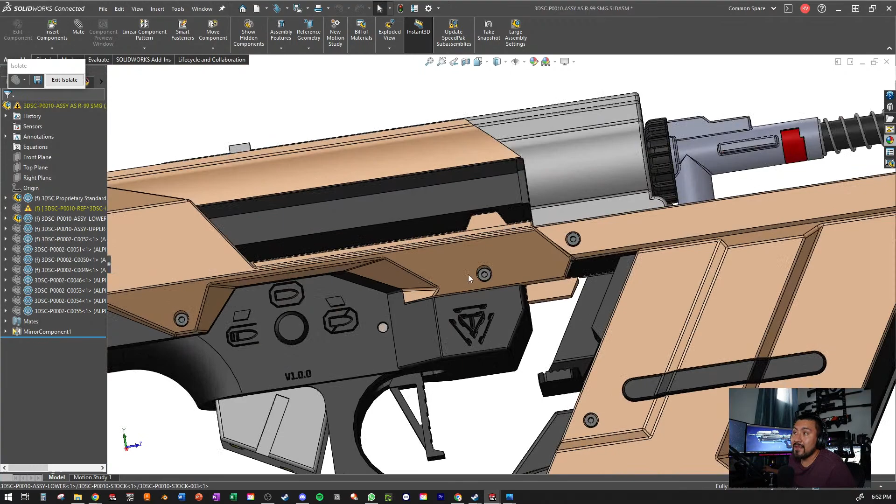So one thing, I am incorporating a dummy gearbox. So with this, you don't need to buy a whole gearbox and system to hold the grip and all that. Right here, I made a 3D printed version. You just gotta still buy the hardware, but at least you'll have a way to put together your gun without buying a gearbox. So for those who are just cosplaying with it, you guys could just buy the dummy gearbox, and there you go—you could put it all together.

And then some other things like a trigger, the fire selector—same thing, hardware. Buy the hardware, you can put this together. And then a couple other functionalities—I don't know if they'll quite work yet, but I'm working toward that goal.

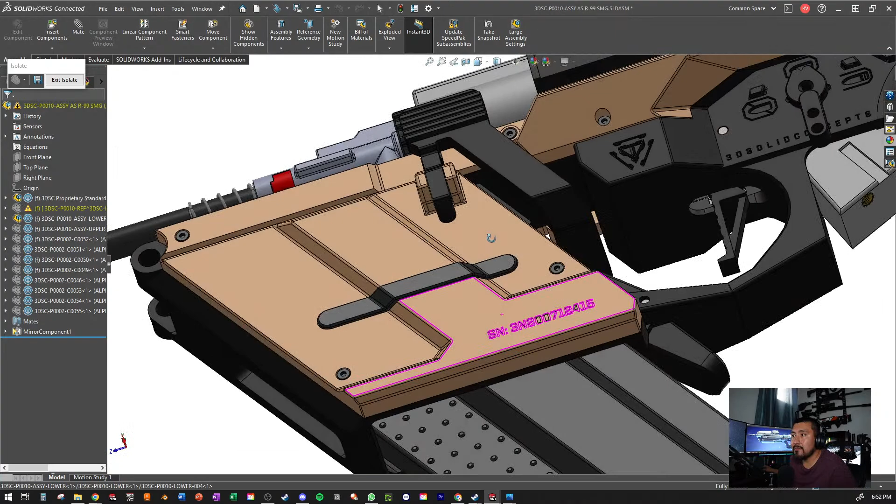And then make my own magazine, especially because the way this one enters, the other magazine on the Car SMG gave me a little bit of trouble. And it's so specific to the one I selected, the EPM one, that it might be tough for some people to actually find it. But for the people that are cosplaying, it won't matter—the magazine's the magazine. In this case, I know there's a small thin section here, but it's supported otherwise.

Right here is the magic, or at least my favorite part of the gun. And basically what I've done here—if I did it, or if not, then what I could do—oh wait, now I know why I did it.

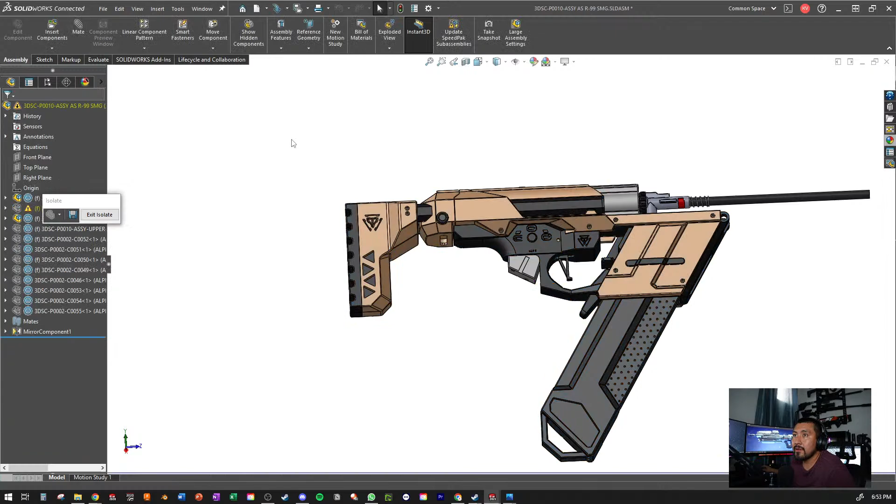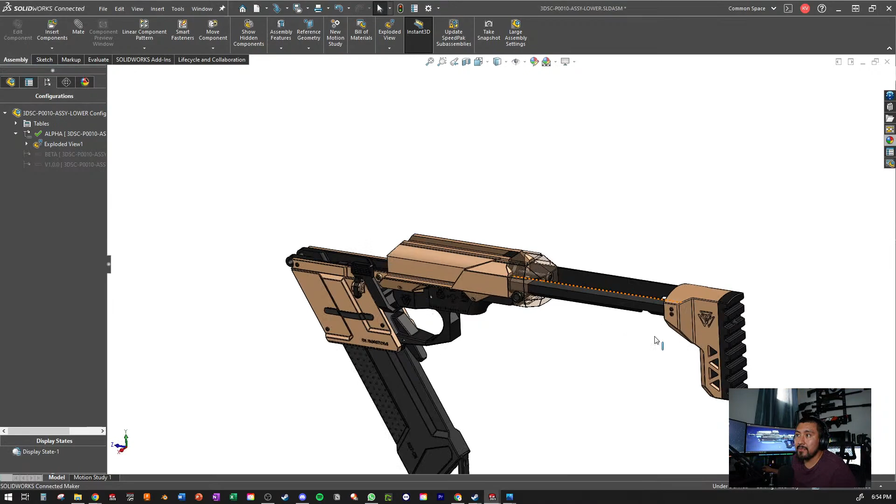I'm gonna go to just the lower portion, and I'm gonna explode it out. Boom, it pops out—there's a button here. There's a whole mechanism on the inside. There's a button here, click that button, basically releases a lock. This pushes back, and I'm gonna put an internal spring in order to push it back for you, so it'll pop out, in and out as you want. So that's a cool little feature on it.

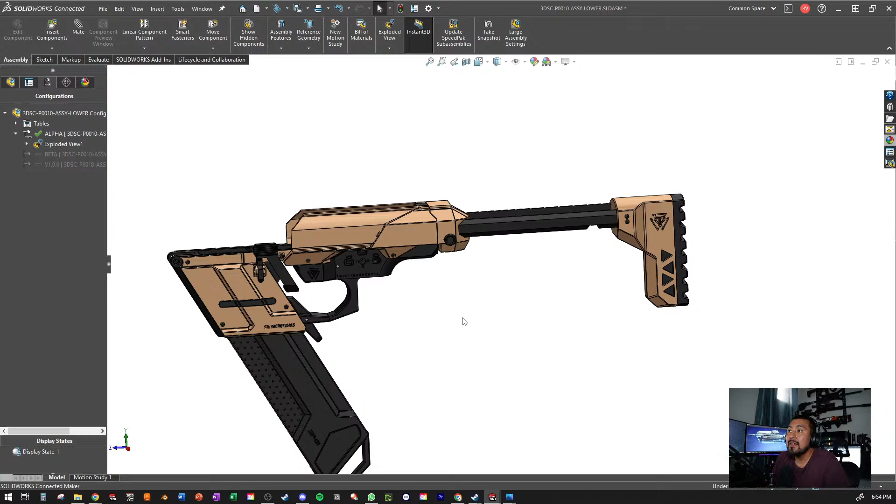What I was thinking is that you can have one or two positions, one back, and then press the button again, it pushes back again, and now you have that adjustability to go 1, 2, if you like, just so you could change that range to your shoulder. I thought that was pretty cool, trying to add some extra features to this. So that was one thing I was thinking about doing in the Halo rifle.

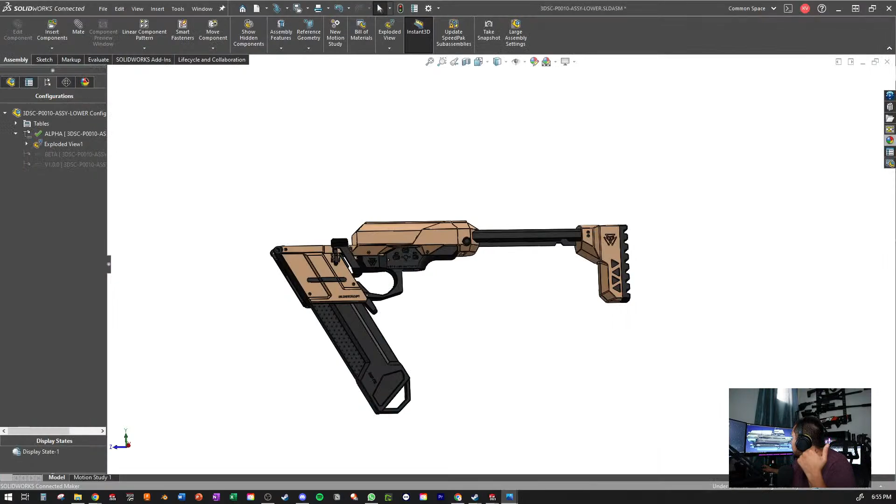Basically adapting the same mechanism. Now this mechanism isn't tested, and I'm not gonna really try to design it in now. But that's my thoughts. Let me show you a couple other features of the rifle, not the rifle, the SMG here.

There's an M-LOK slot, so you could put your own little QD mount there, so you could put your own sling around yourself to hold the rifle. So there's a QD point there. That was like the only real place I could put it that looked okay. And then the other QD point is right here.

So what I've done is I have two different versions. Basically under this is going to be 4 slots of M-LOK, and there's going to be an alternate version, the V2 version, which will allow you to move one slot back and then put your QD mount there, or your QD point. That's what I'm planning to do for my version.

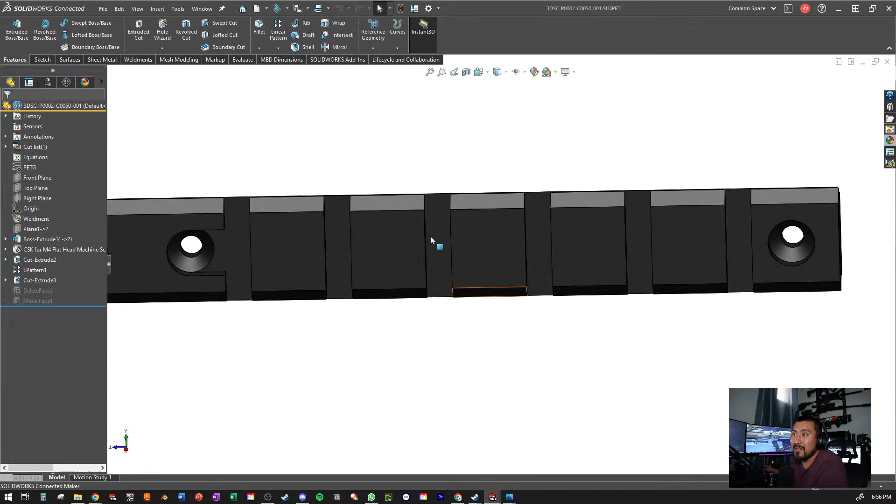I'll show you the alternate version here. There you go, the shorty and the longie. So I'll offer that as a file, the entire submachine gun itself.

But this particular video isn't about the R99. I just wanted to give you kind of a tour of what I've been doing lately, 3D printing this, trying to bring it back to life. I'm gonna go with a DSG build, so 40 BBs per second. Hopefully I can make that magazine hold 160 BBs. I don't know yet, we'll see. I found some cool technologies out there that I could design off of and find out how to do it.

So, the other thing I did is that right here, this is actually going to be a charging handle. Boom.

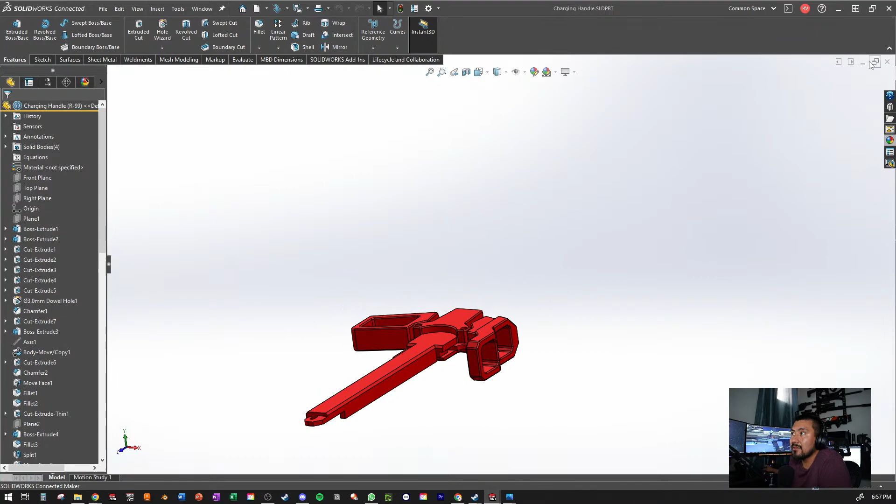I don't have a fake door yet; in the future I'll try. I put the space in there for it, but we'll see. This was supposed to be for that fake door for the bolt, for the fictitious bolt, to kind of simulate the bolt catching on and whatnot.

This actually functions. So if you put your trigger finger here, that same trigger finger could pull down on this and then let the bolt slide forward. And then here's the magazine release, you press down here and the magazine comes out. So all those mechanisms, gonna test it out.

The grip is still kind of green, it's not fully designed out, or I might leave it like that. I don't know, kind of like that clean look rather than what they have on the actual SMG. But yeah, oh, and you see how it doesn't have any stock.

Where do you guys think the battery goes? It does fit, I made it fit, and right now it currently takes a 1100 milliamp 11.1 LiPo battery. Let me see if I could catch that. There we go, so that's the plan, and this fits right now.

I've tested it. Do I have a particular piece around me? Yes, I do, and I'll show you guys where the battery goes. So this is that foregrip. I don't have the brown pieces on it, so this fits comfortably in there, and then fully hides that way.

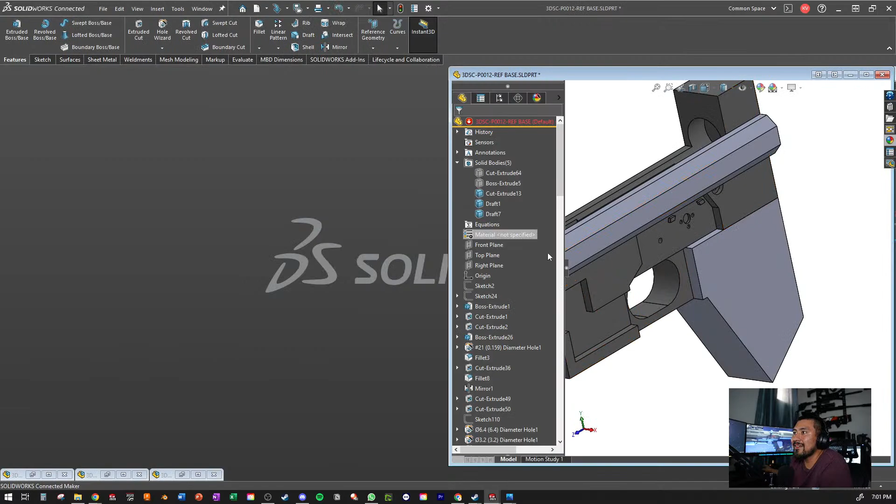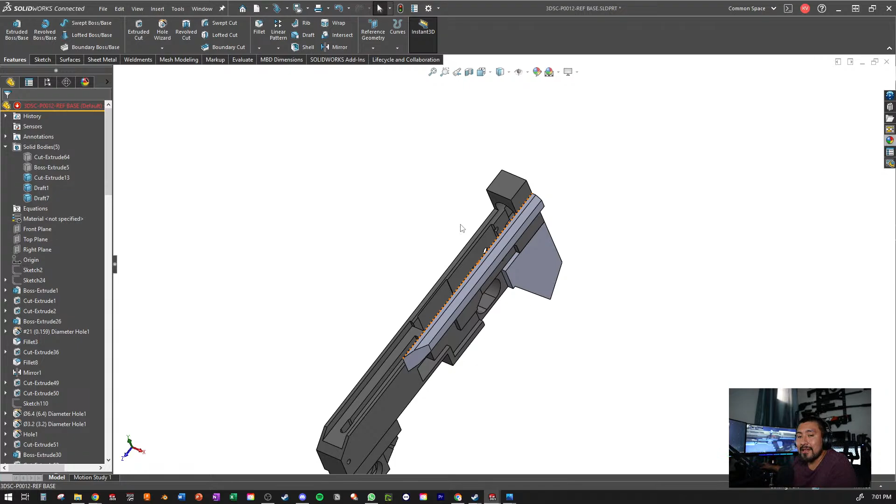So for today, I'm building out the Halo rifle. I built out the rifle last time, and what I started doing is adding all the improvements I did from the car SMG over to this: the larger openings, the closer holding walls, the better tightness of the hop up, and the magazine stuff.

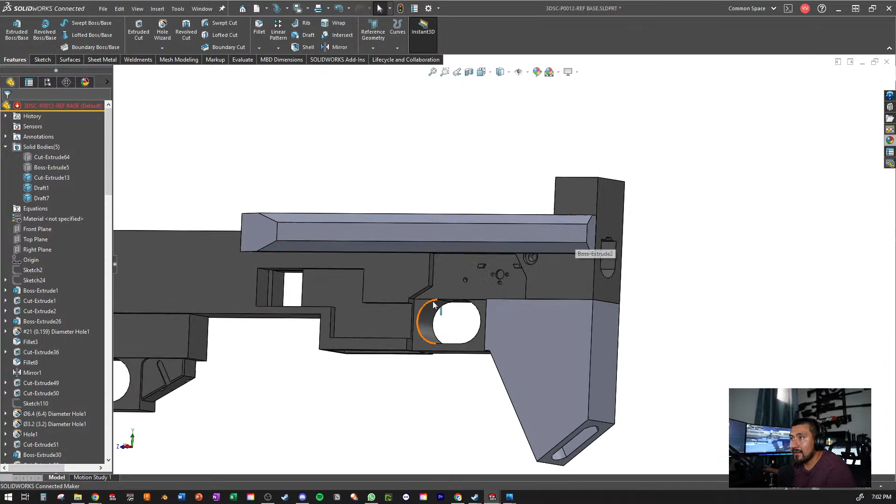At this portion, I've added the point where the retractable stock, the expandable stock, will press in and out. So I've done that here. Now I added that draft, and I guess I'll start going down. Oh, and that's the draft for that. So let me save it real quick.

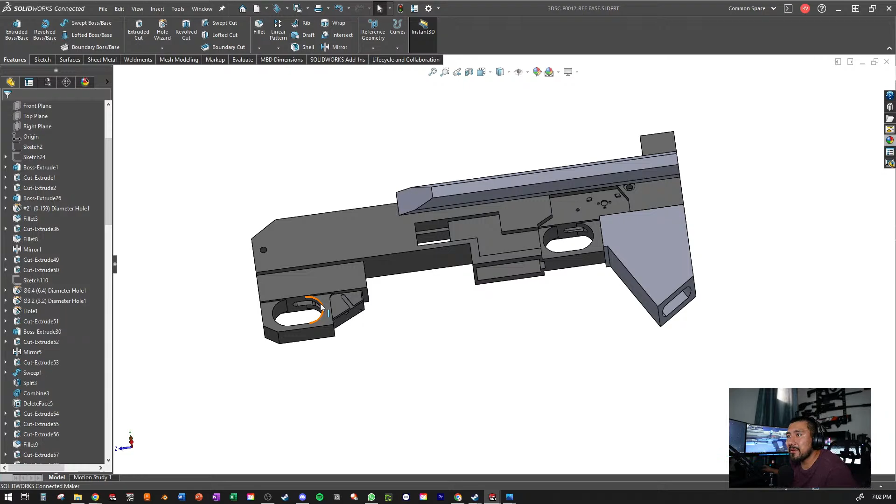I'll be honest, I'm probably only going to be doing this for about 30 more minutes because it's hot, it's really hot. I'm in California, so what is it right now? I think you see it down there, do you? No, blocked it out, but it's kind of hot right now. It says 87, but it feels a lot hotter, maybe because I'm indoors, but it's kind of hot, I won't lie.

Oh yeah, trigger bar right here, I gotta fix the design. When I initially designed this, I think I designed it for the Halo 1, Halo 5 rifle, one of those two, so the trigger has to change.

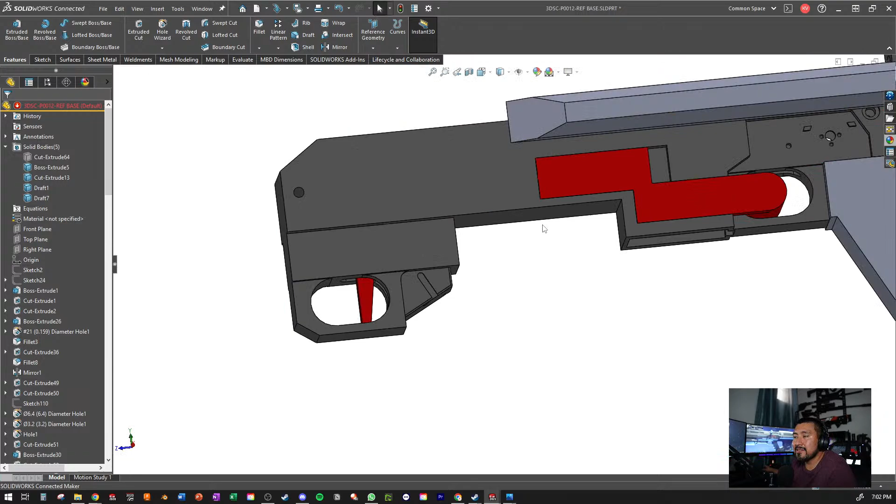I don't know if I'm gonna do that design anytime soon, but I went with this version. I could, but I kind of like this version a little bit more, it's a little bit more modern. But mostly it's this area right here.

Basically, I wanted it - I have a buddy of mine that's working on the smart weapon system, a functional BB tracer and chronograph and ammo counter, blah blah blah, a little smart system, and I wanted to do that here because it's similar to the car SMG. So I wanted to do both designs at the same time in order to release them quicker.

And then the front hood just looks so sick, I don't know, I love it. The bottom could use more love, but this is what I went with, and hopefully you guys enjoy it. It's a little bit of a biggie I think, and that's one of the reasons why I didn't want to find an outer barrel that long. Just find an extension and you'll be fine, it won't harm too much.

A little tiny extension - I'll give you an example of how I figured out that whatever extension will work or not work: I got one stuck in a solid block of 3D printed plastic. Yeah, I gotta find out how to take that out later on.

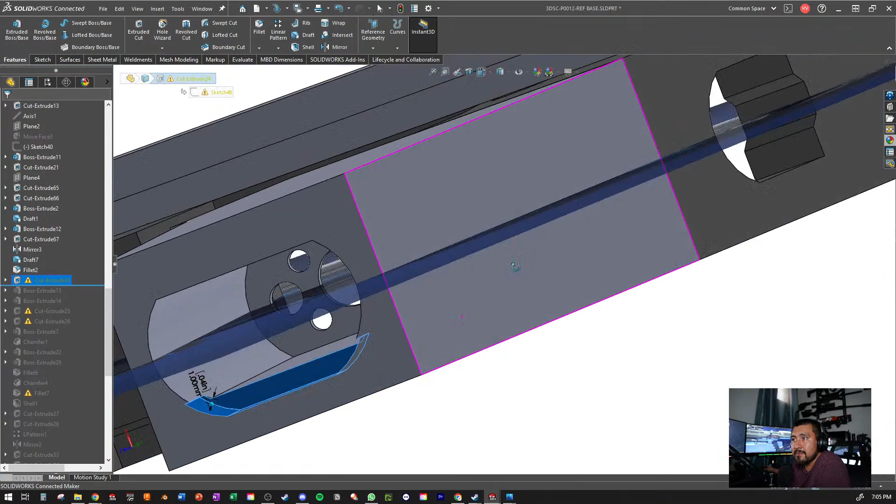And then this part was what I need to go back on, which I'll go back on to do the motor housing. I don't think that's too much of a hassle to do later on. Let me hide this.

Because I think I got majority of the design I wanted. And did I get the... Yes, I did.

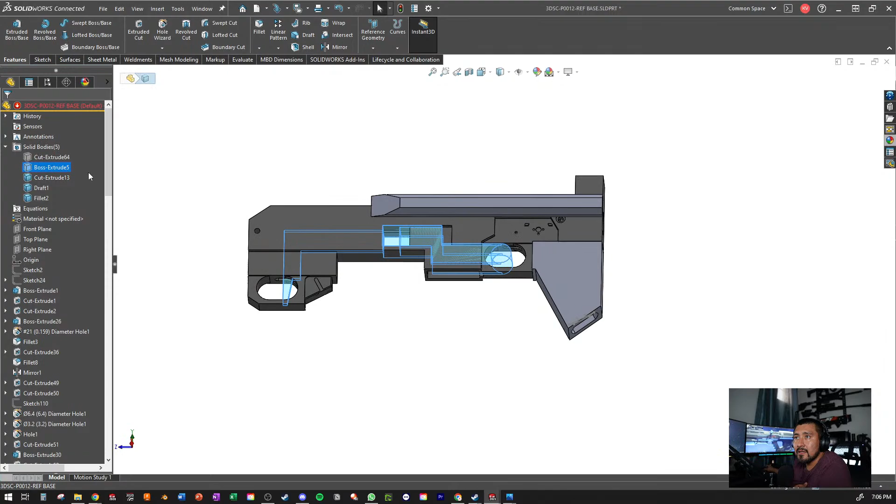You see, that's where kind of the gearbox is shelled on. Oh, I can actually show you where the gearbox is at compared to the actual rifle. Let me say this, and I'll show you guys. It's going to be very similar to the R99 than it is the car SMG.

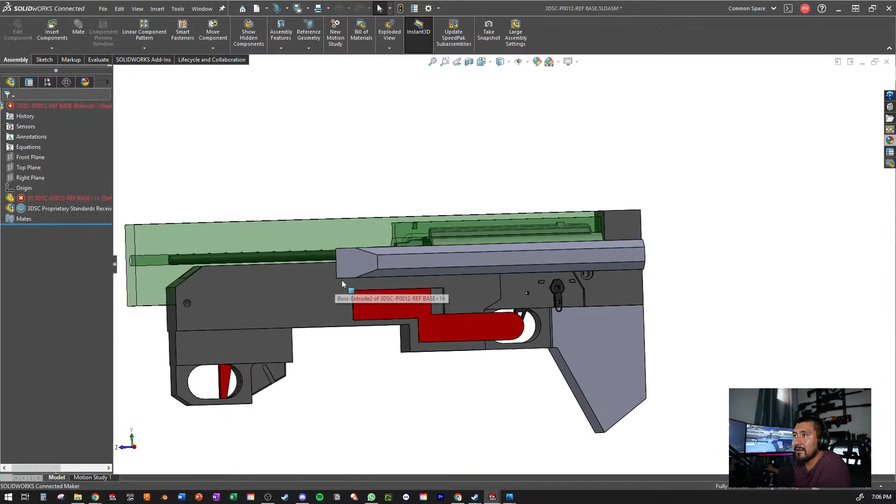Let's see if I have it here. Nope, that's the R99, and it must be the first one. That is my gearbox assembly, my master file. And it's the second one. No, it's not, what did I do with that thing? Ah, there you are. Ooh, up in there. Ignore my errors.

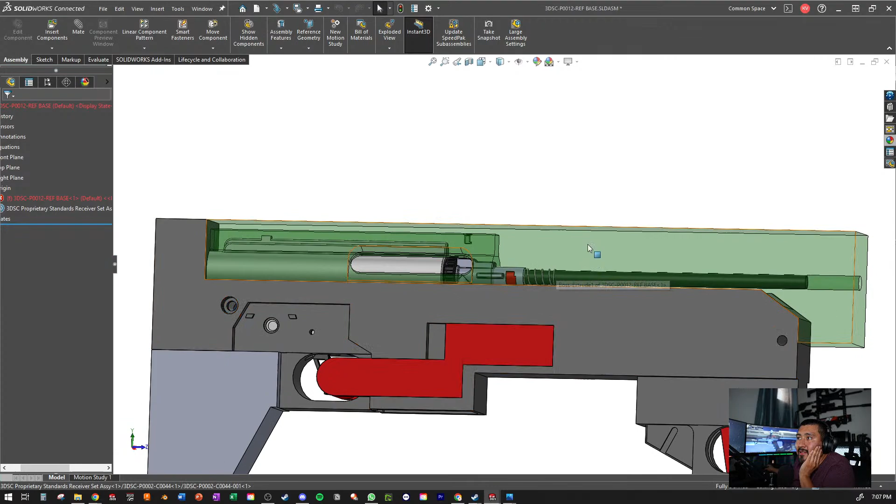But you kind of see where the gearbox is compared to the rest of the assembly, kind of right there. That's where you have your hop up adjustment. I might close that up a bit. Right now this is a standard size. Typically I start with the standard size and then adjust it how I need it. So yeah, okay, moving onwards.

And you know what, I still haven't figured out that recoil bar. I wish I— the only thing is I don't want to get into electronics. I want to be able to get you guys 3D printed files and mechanical solutions, not electrical solutions, especially because I'm not exactly an electrical engineer. Mechanical one.

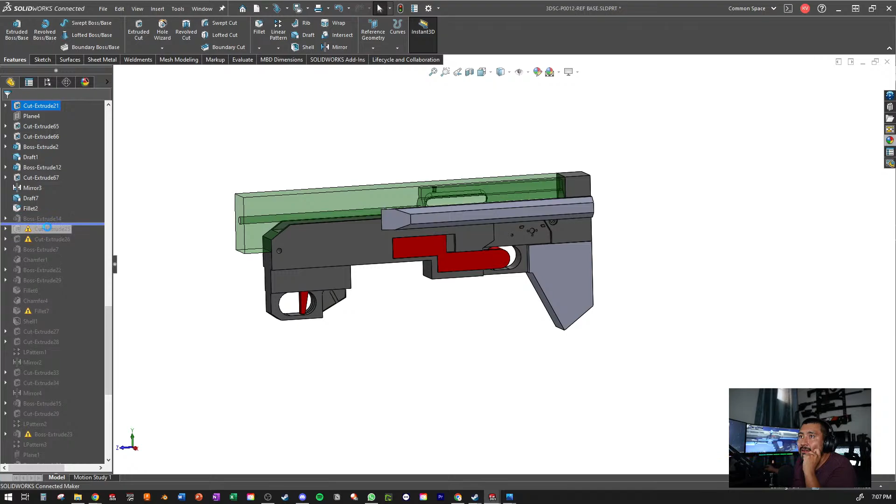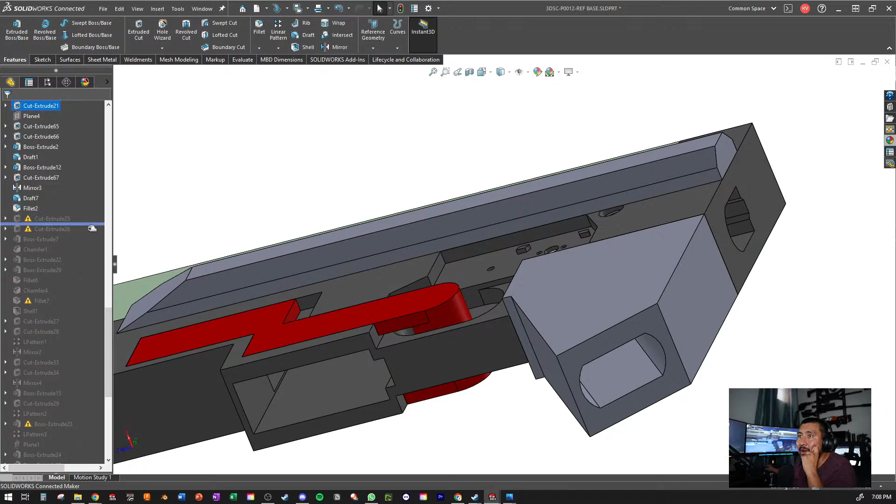Ooh, I hear a fly. And I have those headphones that block sound, noise cancellation headphones, and I can still hear the dude. Yeah, I have a fan on my left side and I would turn it on, however, you could hear the fan in my mic. So right now, I'm suffering so you guys don't have to hear all the noise. But I enjoy it, it's for you guys, even for the people that are here or not, or will watch this later on.

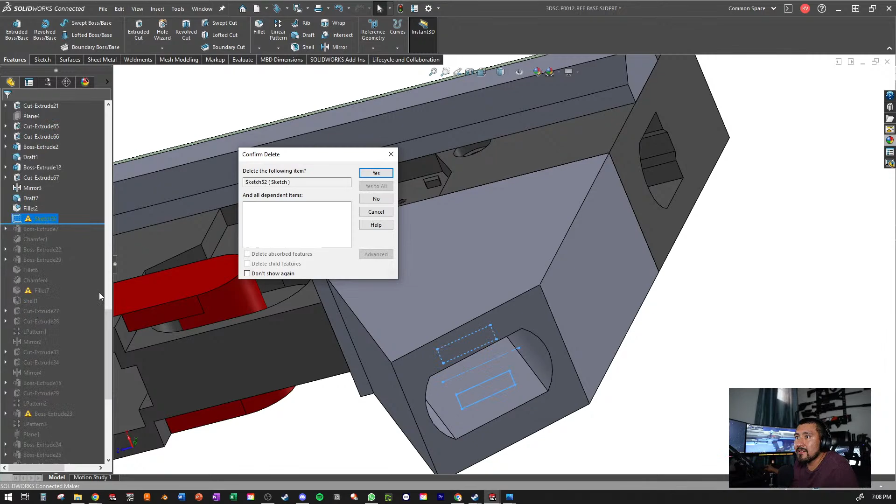Let me know if this kind of stuff interests you or not. To me, it's interesting, I enjoy doing this. It's a good pastime for me, gets me to kind of talk with people other than myself.

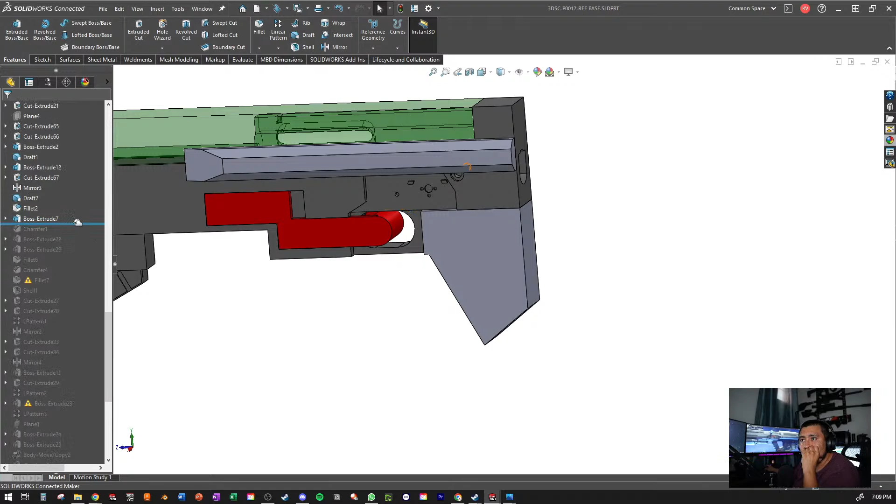Let me see what that's about. Ah, there's the first bar. Okay, so I got through the first portion of this. There's the chamfer. And I think everything is kind of just— oops. I think everything just kind of pulled down for now.

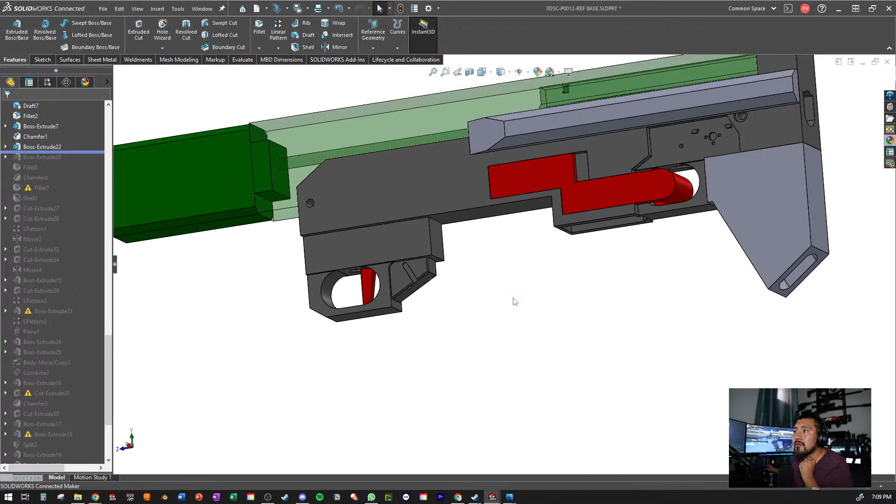Oh yeah, it's hot. Oh, there we go, this is something I wanted to tackle. So before I get too deep into it, I want to see what I could do about that portion of it, because it's not that I didn't like it, it's—I think I could improve it.

So let me show my sketch. Let me make this transparent, that way you can see it. I'm gonna hide that bar. Go to my right plane.

Right now this is a standard magazine size, sorry, AR-15, M4 style magazine size. So I'll change it up once I can. There we go. I'm kind of thinking I can move this back just a tad. Maybe I'll do that. It'll probably make this area a little bit bigger.

See where the trigger's at. I had to oversize it just a bit to kind of encompass everything. If I made it too small, then this entire thing would be, I don't know, odd looking, honestly. I could bring down this just so I could get that. Yeah, that's something I need to fix. I can't do it there. However, the radius here is correct for the grip.

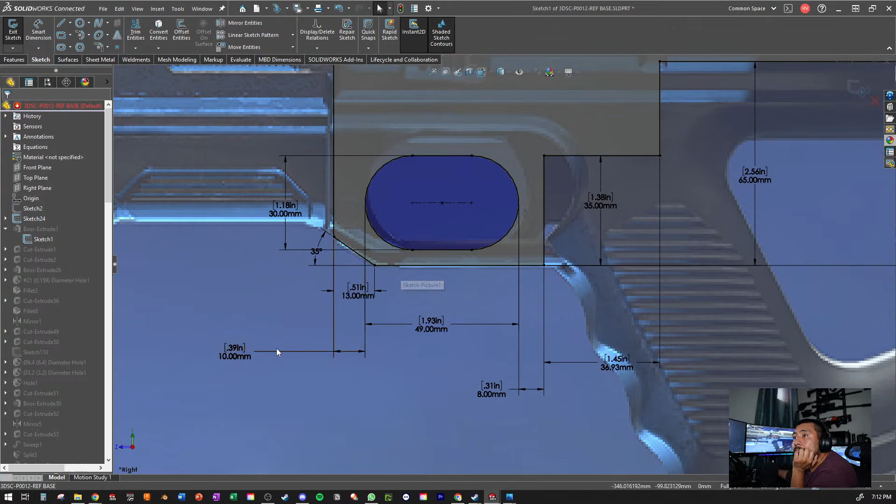There you go, this is the portion I want to move back. However, if I do choose to move back, what's controlling this distance? Where do I have my controller at? I think it's this one right here. So if I delete that, there you go. Make it 260. Might go back just a little bit more, 255. There we go, makes it a little bit bigger there, but I think that looks okay.

That may break some stuff. Oh, it didn't break anything. Okay, I can live with that. I would like to lower this. And then this will actually have a curve, so let me go back to here.

So this round here was for something different, so this round I could delete. And all my buttons are on another screen. This one, basically I could bring down.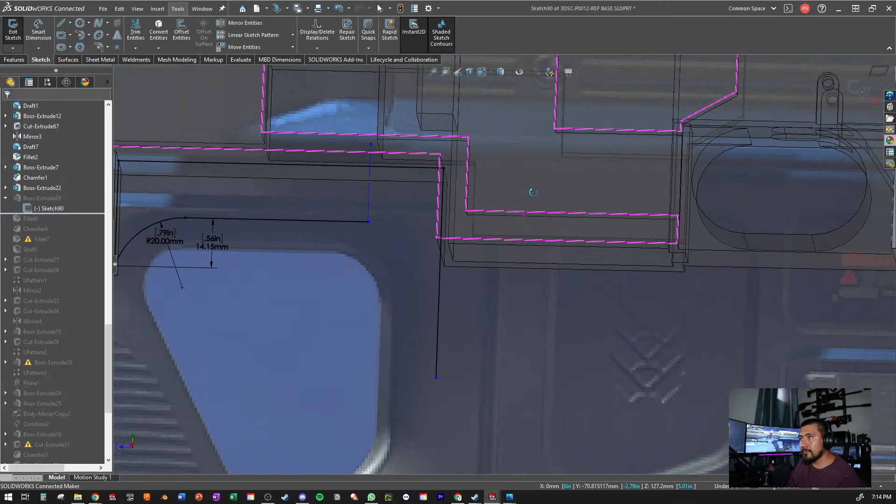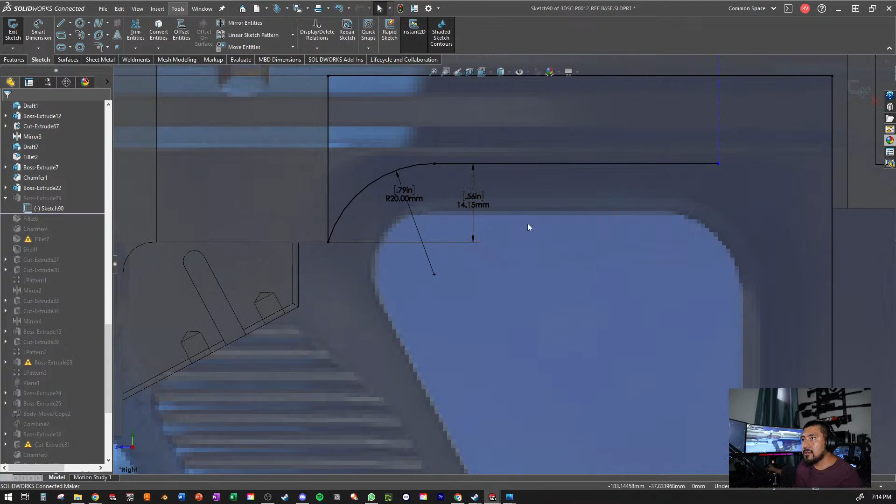And this, 14.15. Honestly, like this would be the best, that way it could go all the way around.

Let me see if I go—yeah, that'll make it the most curved. However, I don't have that kind of curve here. I could probably bring up this cut a bit more and cut into the top of this, which I'm thinking of doing.

This may have to wait, actually. I'll leave it at that point for now. It doesn't need to be 20, it's just the radius that goes there is 20. This one, I'll make 20 as well. I won't give it a dimension just yet, because I want to see something.

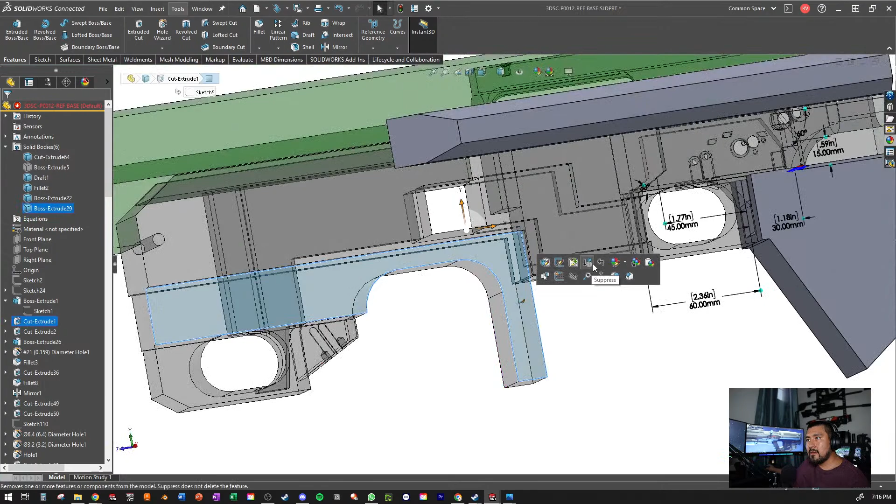So there's that. Now I kind of got the rough shape, so I could hide my sketch. And then let me make this not transparent. And look at that. You can see where my dilemma's at.

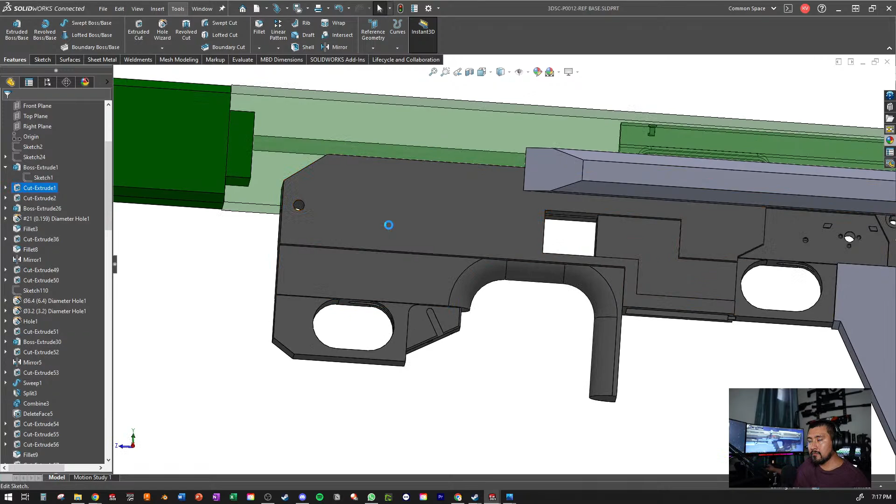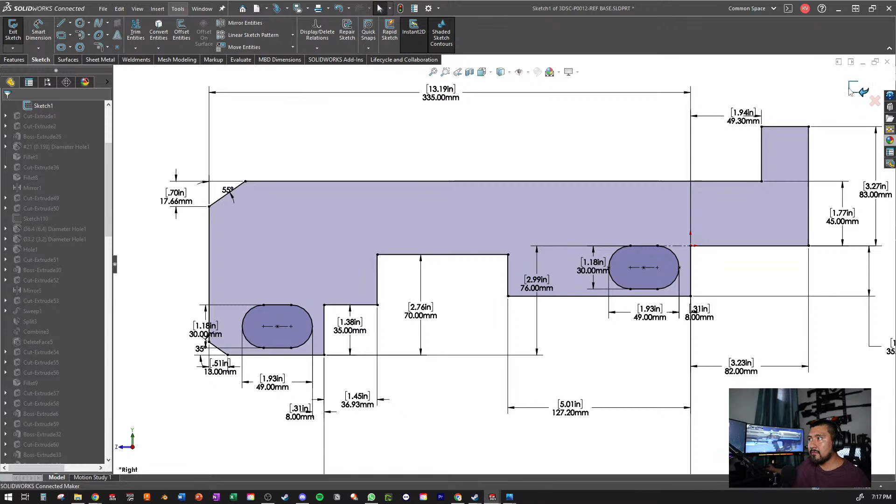Let me save this, and then I might raise that up. Let's go 70, see how much it messes things up. Ah, there we go, that wasn't too bad. Didn't mess anything up, nope. Okay, cool, that works for me. So now I can proceed to the grip.

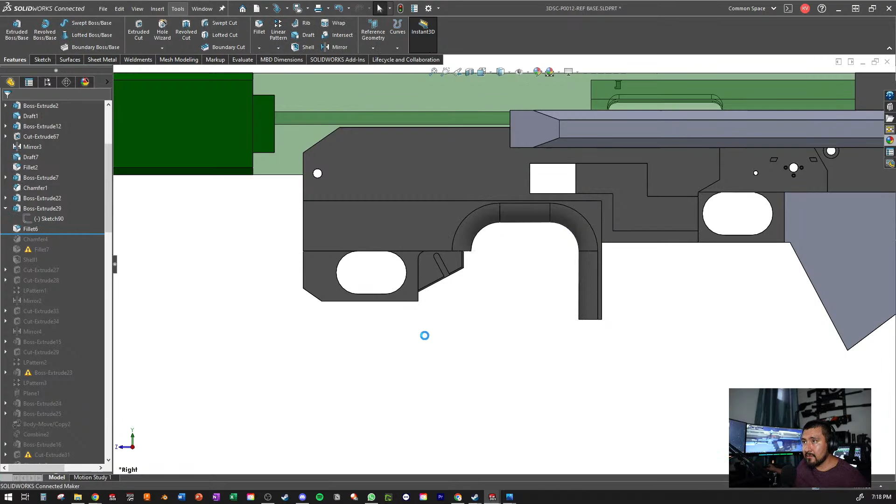Okay, nice. So I'm going to leave that sketch to another time, and then I could start on my sketch for the grip, which I could probably take from here. Actually, I don't need to do this one right now. Actually, do I? Because I need to know where it comes back at. That's the thing, yeah, that's probably fine if I start it here. It probably wouldn't disrupt too much. There we go.

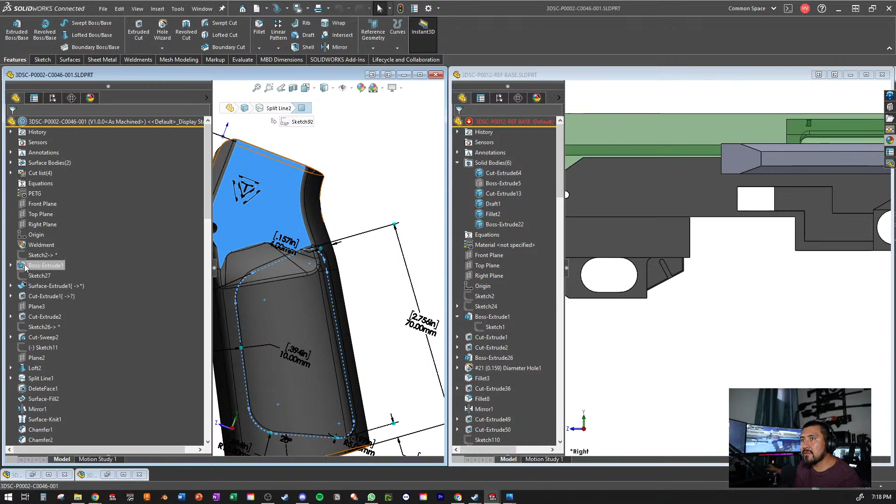And then I need the principal sketch, which is the first one, my base sketch. And then you guys copy at your heart's content.

Ooh, what happened to all my dimensions? Ooh, what happened to my relations? Okay, what's going on here?

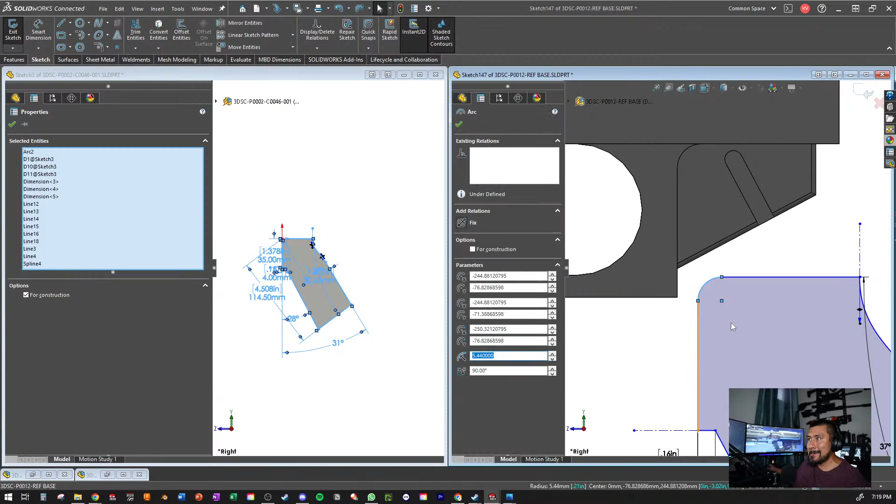Collinear. Oops. Oh yeah, it is hot in here. So this may not be that long because I need some cooling.

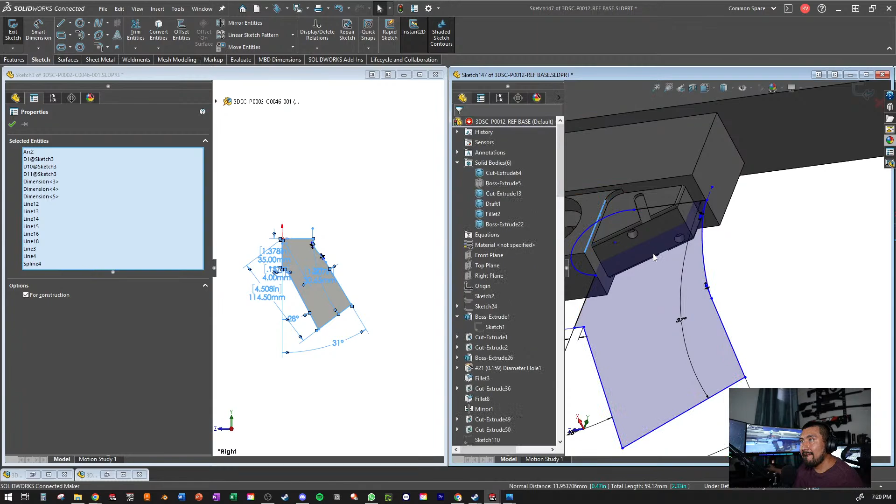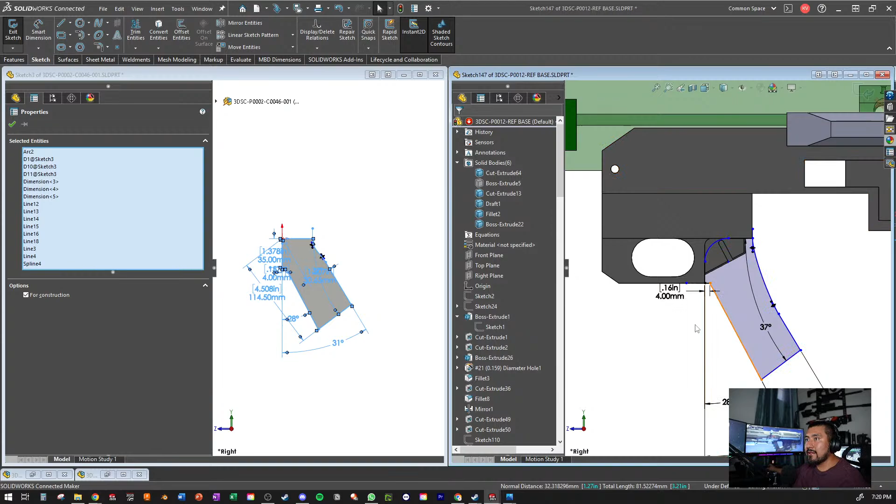Tangent. Collinear. Yeah, see, there's too many dimensions that changed. I feel like I lost a lot of dimensions. Why? I'm gonna do this instead. I'm gonna delete this. Grab a point.

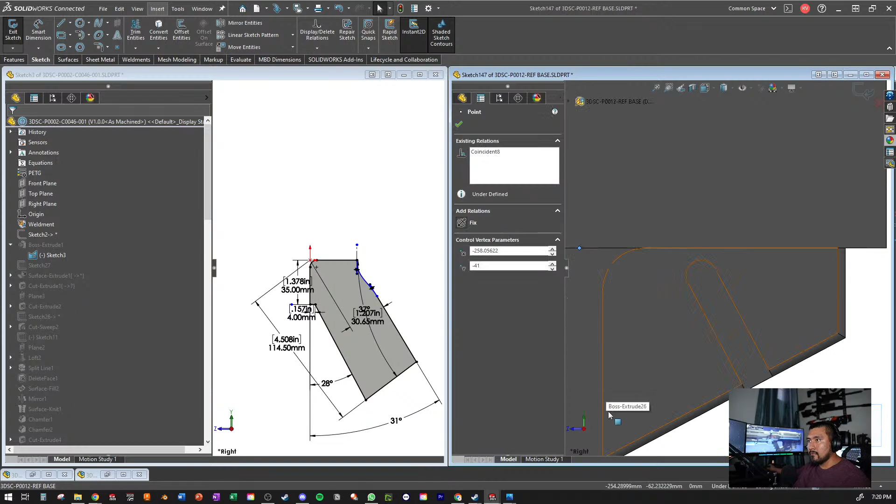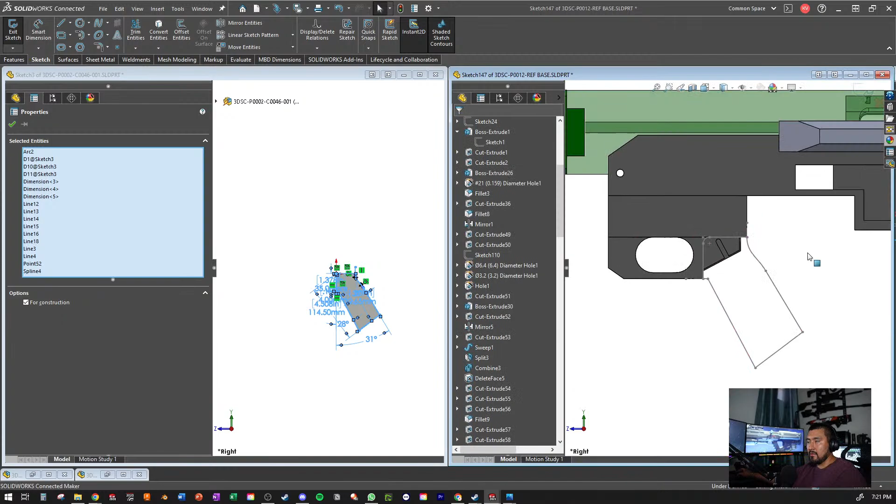Concentric. Now I'm gonna copy this, come to here. Make this a block, and then drag it here. And now I could kind of figure out what was happening, because I could explode the block. Make this one here concentric and equal.

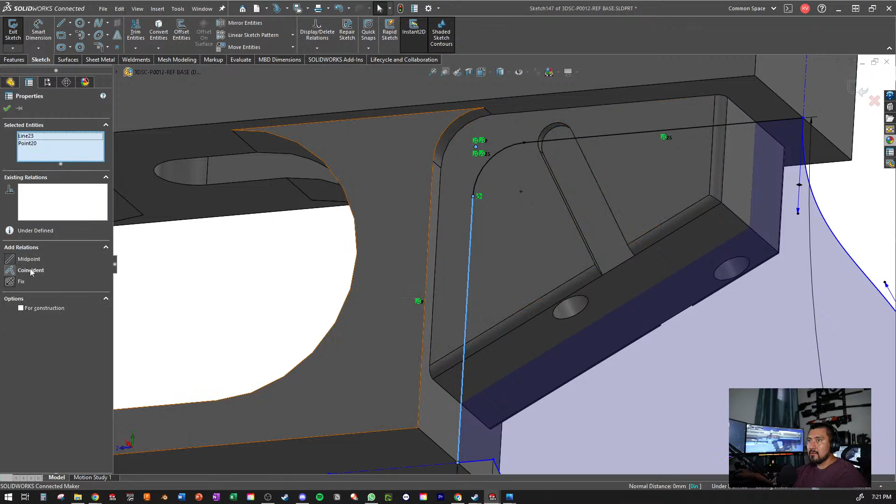This one here tangent. Tangent. Concentric. Okay, there we go. There we go, there we go. I'm missing a dimension from here, which I may change this one.

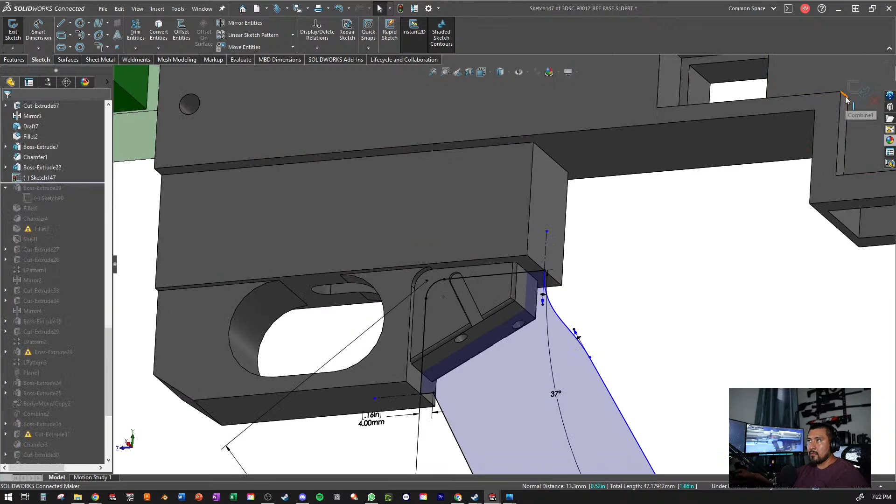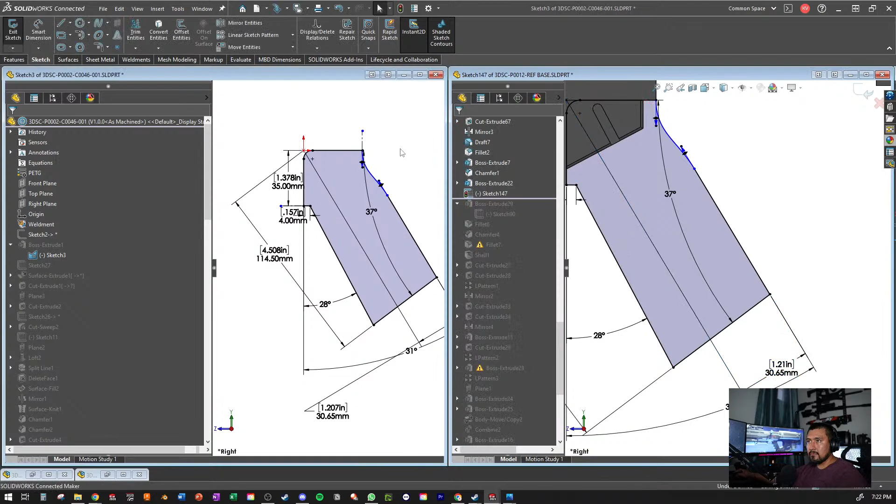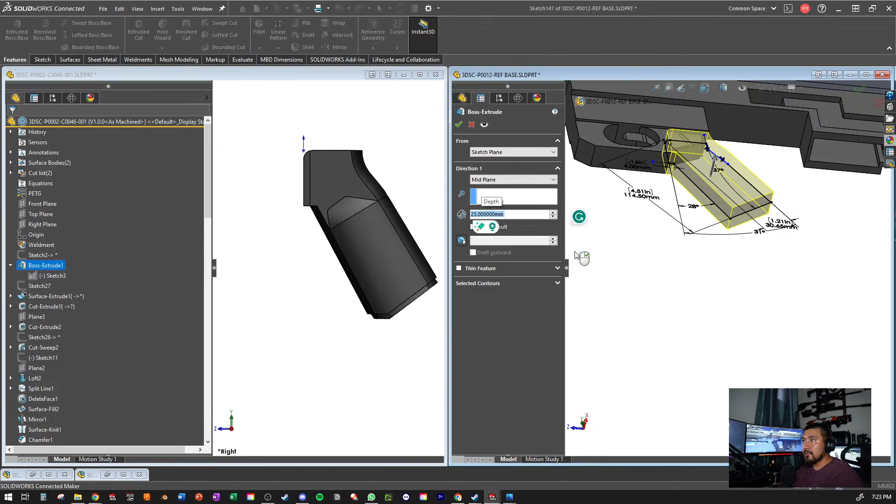37°. What is it, 23? I think, I don't know what I just put. There we go. Okay, that kind of helps me out where this kind of all lies at.

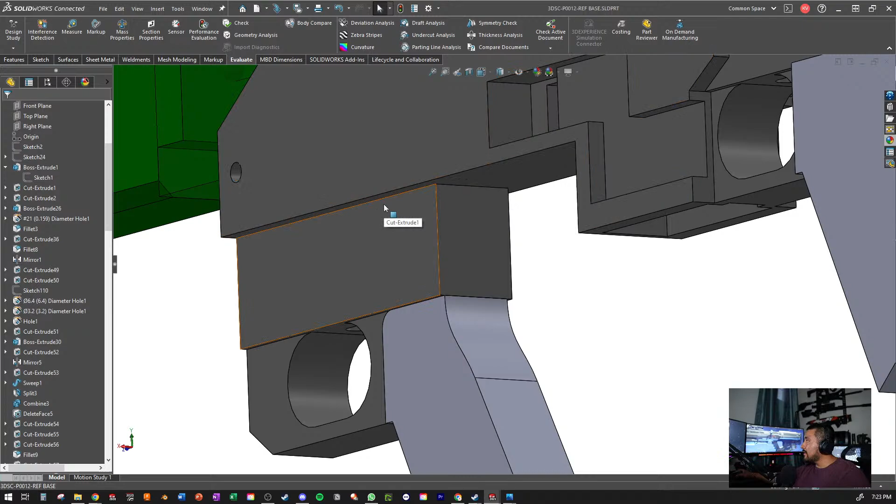Then it's going to come up, meet there. That's how kind of the R99 is. Okay. I'm going to go down with my radius. This is where I get to pick how this looks.

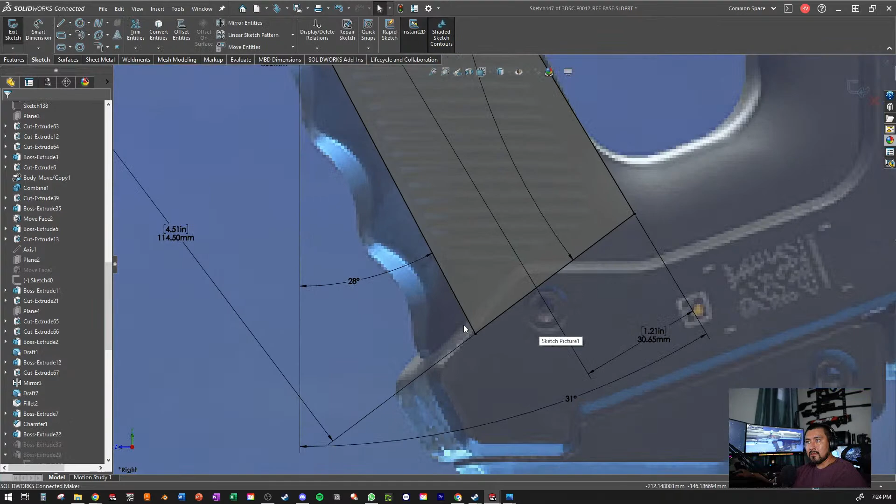The only thing I don't really like is the angle, but other than that, it's actually kind of good. Which I may add the divots, but I gotta see what my thickness is comparatively.

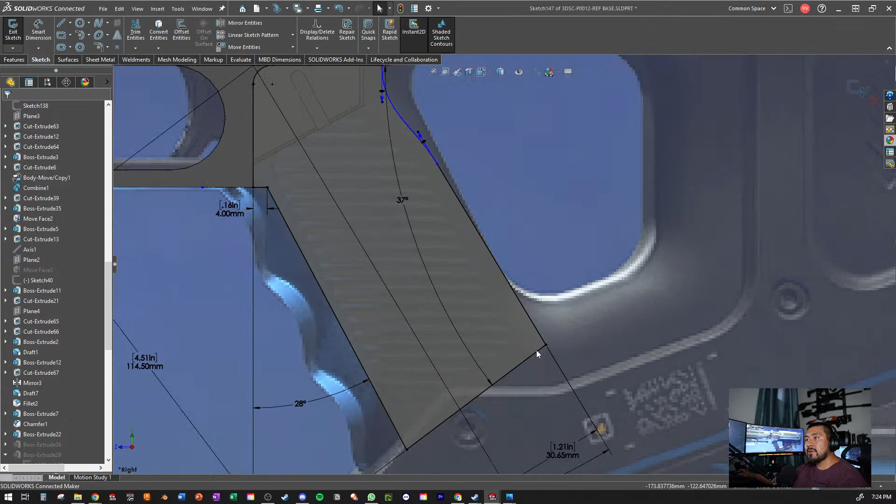And then this here, of course, this is pretty okay. And then it's gonna come back up. So, bam, bam, bam, bam, bam, bam.

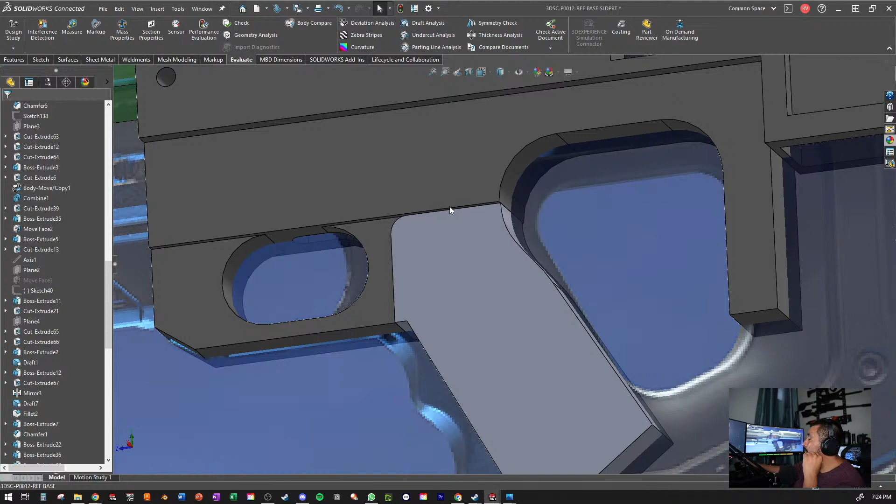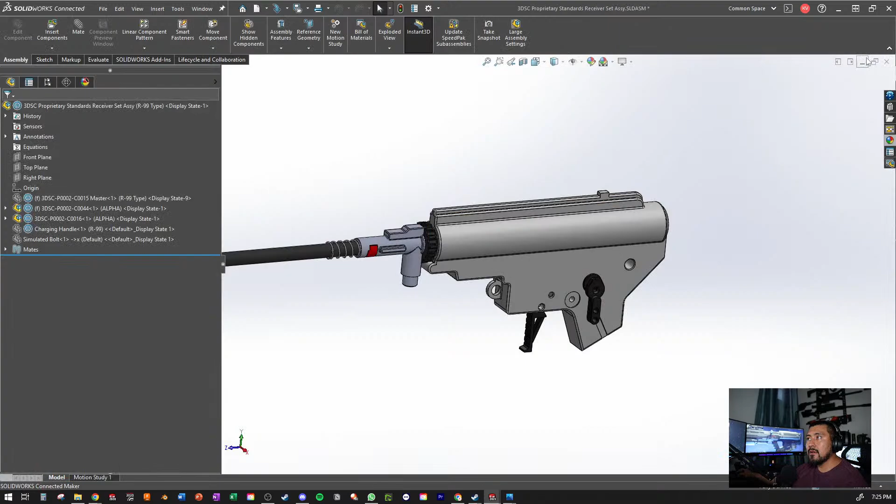Way up to R-99. Open up the R-99, yeah. Boo-doo-doo-doo-doo-doo-doo.

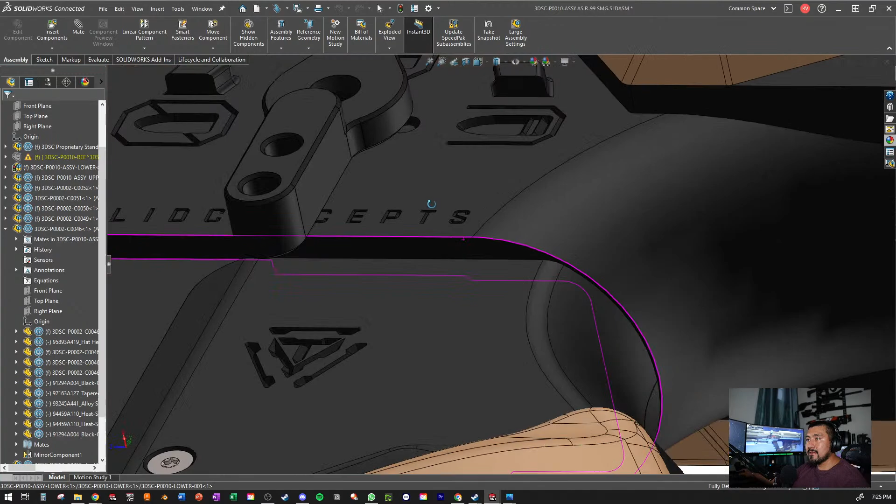That file is taking forever. Oh wait, it's here. Oh yes, it is here. See, that's what I did last time.

So my thickness, I'm gonna try to get back to 23. Okay then, so. That's what I'm gonna do. Actually, before I do that, yeah, I gotta get back to 23.

Is there a distinct kind of design here that I could use? Anything? Not really. So what I could do is here, there. Let's do that.

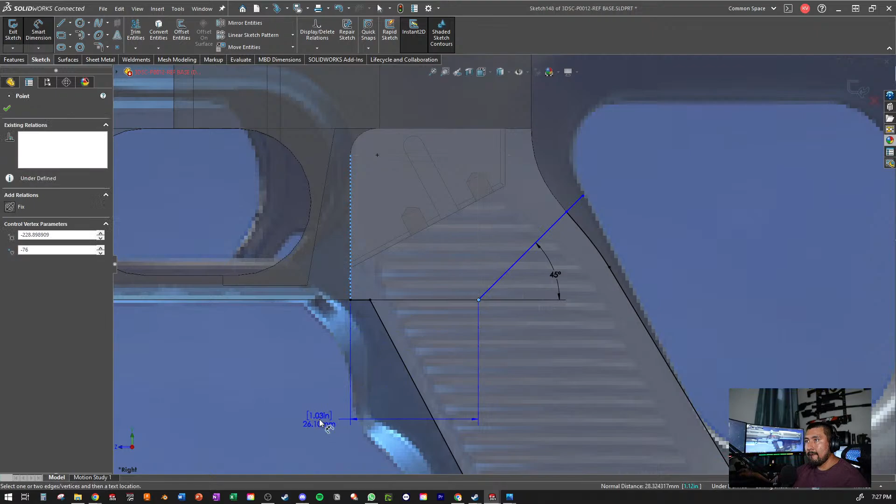Okay, that is just to separate it. I might change that design in the end, but for now, I just need to get to, I believe, 25. Mid-plane, 25, 26, I think it's 26.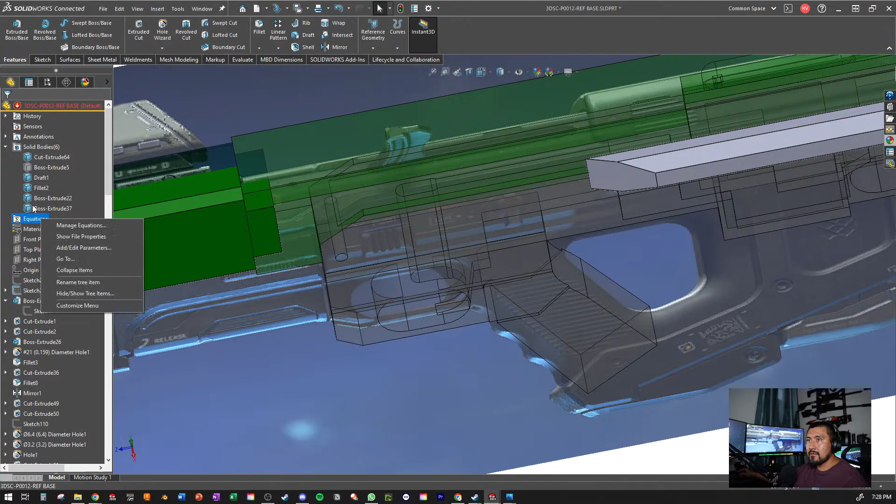Oops, oops. Definitely not what I meant to do. Just that.

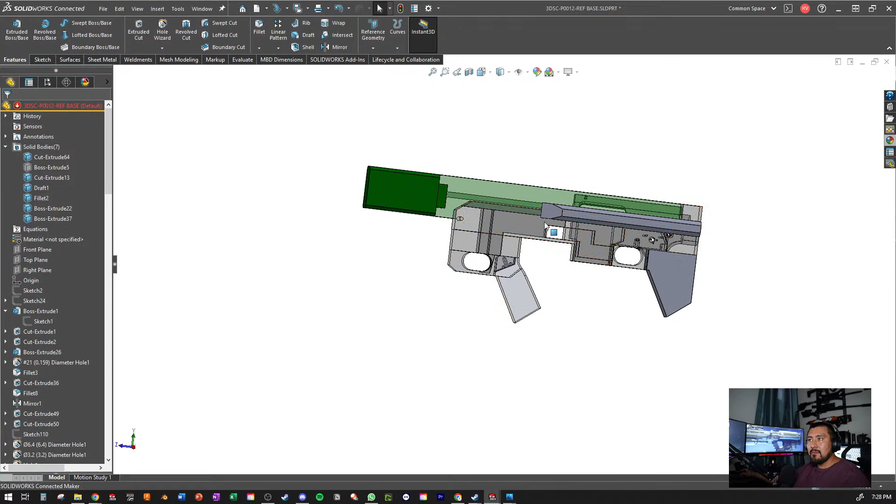Might lower that line, but that's for another time. I just want to get the rough shapes in place before I start doing so much detail work, to get a size comprehension of the entire thing. And then there I would actually start making the major modifications.

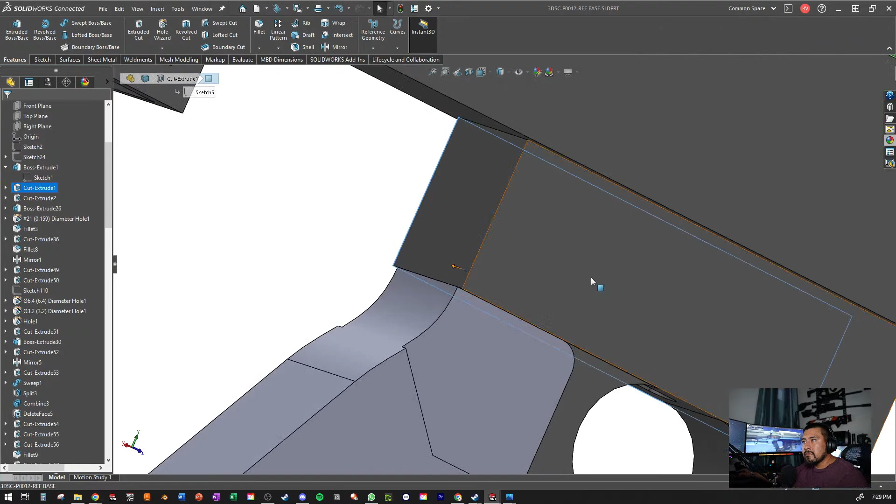26.6. That is my goal here. 26.6. 26.6.

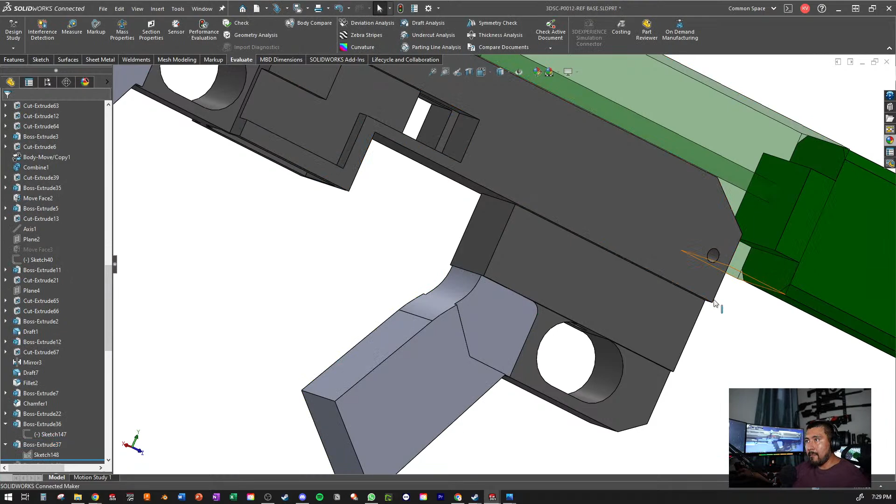Okay, so I made the grip here, and I'll continue here going around another time, maybe not even on stream. But you guys kind of understand my process at this point, what I'm trying to do.

And this is gonna be like a regular grip that you use on your M4, so that's my hope with that. And then this will be an entire cover that goes under it. But kind of liking it.

You know, I may work on this a little bit more tonight. It's just too hot right now to go the full hour without any air conditioning. You know, my hands all sweaty and the mouse keeps on slipping on me. But you know, enough of my excuses.